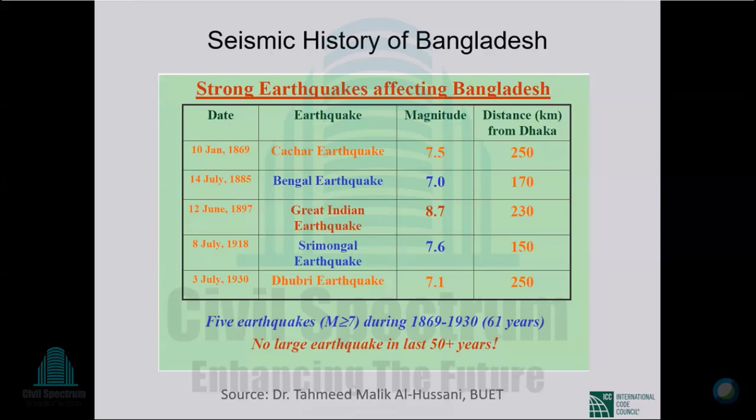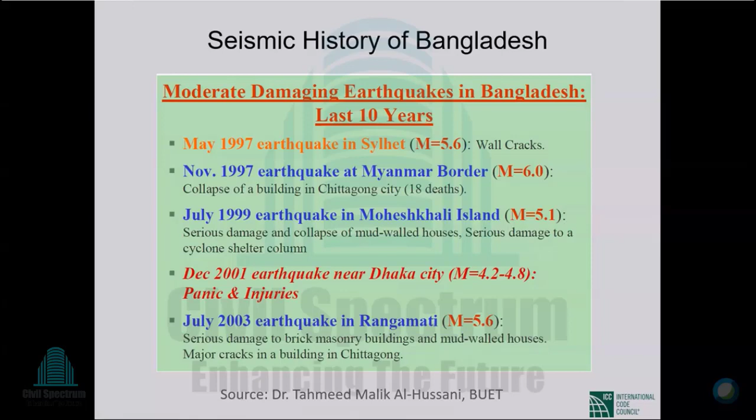The important thing is no large earthquake in the last 50 plus years. Okay? So we just have been lucky. It is approaching 90 years of no large earthquake. Moderate damaging earthquakes in Bangladesh during the last 10 years: there is a list. May 1997, Sylhet, November 1997 near Burma border, July 99, Moheshkhali, December 2001. This is an earthquake near Dhaka. There was panic and injuries as the slide shows. July of 2003 earthquake in Rangamati. So there has been no large earthquake, but there have been moderate earthquakes in the last 10 years, definitely.

The next thing that I want to touch upon are these terms hazard and risk. They are quite often used synonymously, but they are not interchangeable. They are different things. Hazard is the potential for ground shaking or flood happening or a cyclone hitting. So the potential for something happening is the hazard. Risk is potential for losses if that something happens. Okay, so potential for losses, human loss, economic loss, all of that that is associated with the hazard. So flood is a hazard. People dying of flood is a risk.

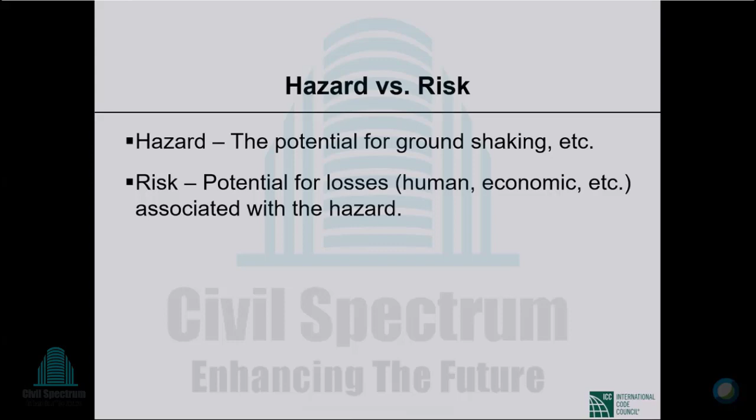Okay? And that tells you that earthquake risk depends on what type of structures we are looking at. If they're flimsy structures of shoddy construction, the risk is high in the same earthquake. If they're sturdy structures of sound construction, the earthquake risk is low, the earthquake hazard remaining unchanged. Okay? So hazard versus risk. Hazard is independent of the type of structures or infrastructure you have. The risk is very much dependent on what you have built and how.

Earthquake ground motion. At some time after their generation, seismic waves reach the Earth's surface and set it in motion. The surface of the Earth is set in motion, which we refer to as earthquake ground motion. Very, very familiar term for those of us who deal with earthquake engineering. When earthquake ground motion occurs underneath a building, and when it is strong enough, it sets the building in motion. And the motion always starts with the building's foundation. The foundation is moved from underneath the structure.

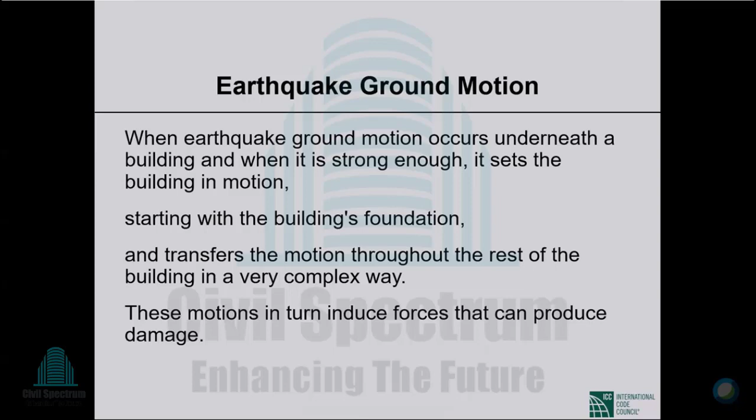The foundation transfers its motion throughout the rest of the building in a very complex way. This is, if anything, an understatement. Okay? So the foundation starts moving in an earthquake, and when I say start moving, it's not in one direction; it is every which way, and this movement is transferred to the rest of the structure in a complex way. These motions, in turn, induce forces in the structure. When the structure begins to move, there are forces induced that can produce damage. We will look at these things in more detail.

If you are far, the ground motion would have died out to some extent, so the movements of the ground and so forth will be less than in the epicentral region. There are all kinds of attenuation relationships that are proposed in the literature, and these are invaluable in trying to figure out the ground motion at a site away from the source. Anyway, I don't want to go deep into any of this.

We can decide whether we will go with the median attenuation relationship or median plus one standard deviation or median minus one standard deviation. We can put an equation to this curve which will tell us how the ground motion dies away. And these are very useful, as I said, in figuring out the earthquake ground motion at a particular site.

The next set of terms that cause a lot of confusion, very, very widespread, are intensity versus magnitude. Earthquake intensity versus earthquake magnitude. Intensity is qualitative, very important, as opposed to quantitative, but it is widely used. Magnitude is quantitative.

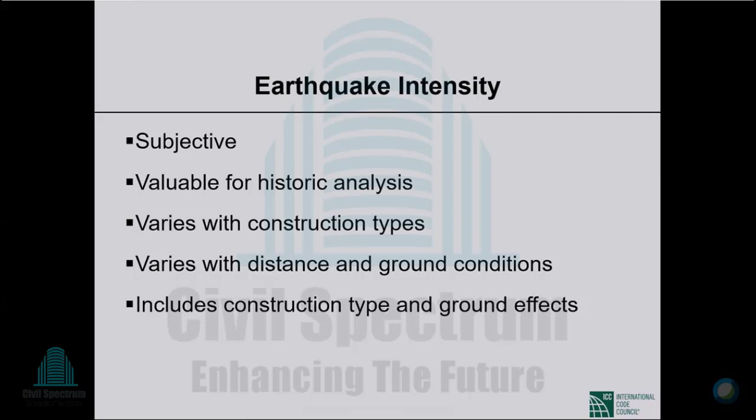So, earthquake intensity is subjective as opposed to objective, valuable for historic analysis. When we did not have magnitudes, we had intensity scales. It varies with construction type. This is very important. Okay, we talked about local conditions. If you don't have any structure, then there is no damage. It varies with distance and ground conditions. Okay, so distance from source to site, and ground conditions includes construction type and ground effects.

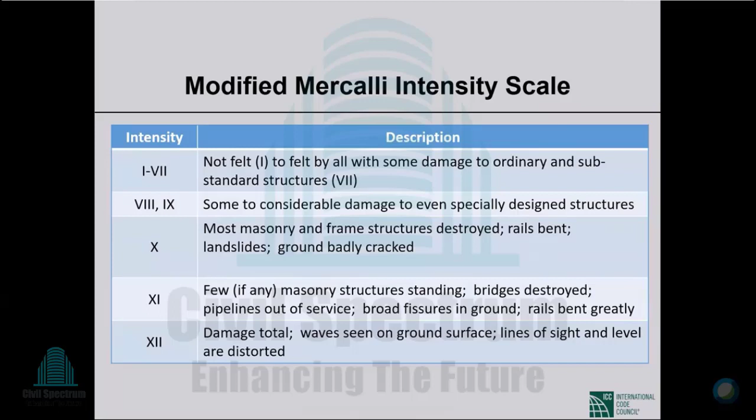So in this business of earthquake engineering, whatever you look at, there is no one intensity scale. There are multiple intensity scales. For magnitude measure, there isn't one; there are multiple. The Modified Mercalli scale, however, is used in much of the world, and this shows that it gets serious when the Modified Mercalli intensity is 8 or 9, some to considerable damage to even specially designed structures. 10, most masonry and frame structures destroyed, rails bent, landslides, ground badly cracked, etc.

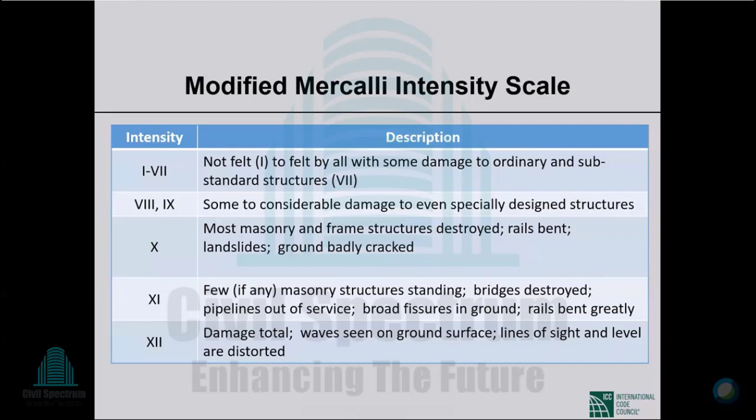11, few if any masonry structures standing, bridges destroyed, pipelines out of service. 12 is almost total destruction. Okay. So below 8, it's not particularly serious, although there can be damage. And when you are looking at 10 or 11, it is a very, very serious affair. Magnitude is quantitative. Magnitude is the size of the seismic wave that is recorded on a seismograph. Okay, the size of the wave.

All magnitude scales are logarithmic. You go from magnitude 7 to 8: the magnitude 8 earthquake is 10 times as strong as the magnitude 7 earthquake. It's not a little bit stronger. Okay, this is very, very important. So 7 to 8 is a tenfold increase in energy released at source. Magnitude correlates with energy released at source, as I just said.

Moment magnitude is the preferred. So there was initially local or Richter magnitude. Now there is moment magnitude, surface wave magnitude, body wave magnitude, and others. Moment magnitude is more and more favored, but we will not go into all that stuff, and the numbers are not terribly different. They are different, but not terribly. I mean, something that is 6 on one scale will not be 9 on another scale. Could be 6.2 or 6.3, whatever. Okay. So, magnitude.

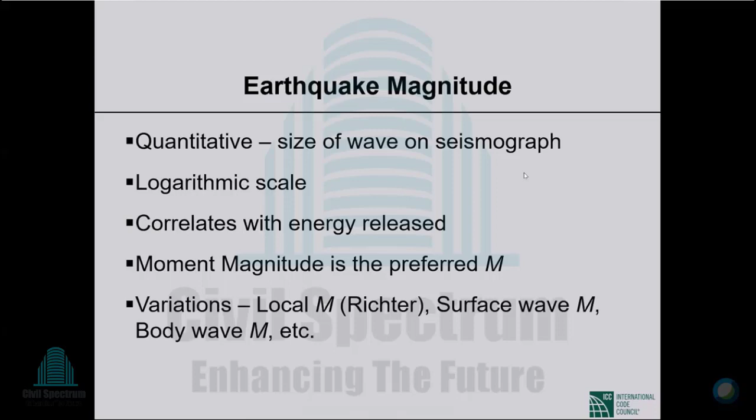Geological factors affecting ground motion at a site. So the source mechanism, the energy released at source, is one thing. The type of fault, the amount of fault movement, how deep the focus is, all of those play a role in the ground motion that you will experience at your site. Those are source mechanism related factors. Then transmission path from source to site. Are the seismic waves coming through rock from the source to your site? Are they coming through alluvium? Are they coming through mud? So this will play a significant role.

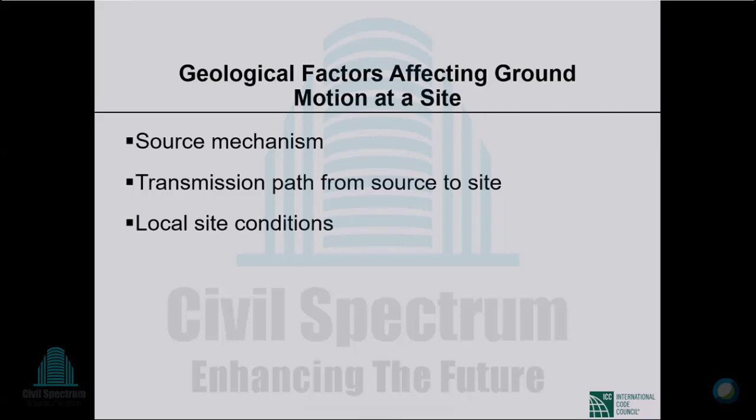And then local site condition. Do you have rock where you are on the surface, or is there a deep soil deposit overlying rock? Because the soil overlying rock can magnify ground motion. That is very important, as you will see in some detail.

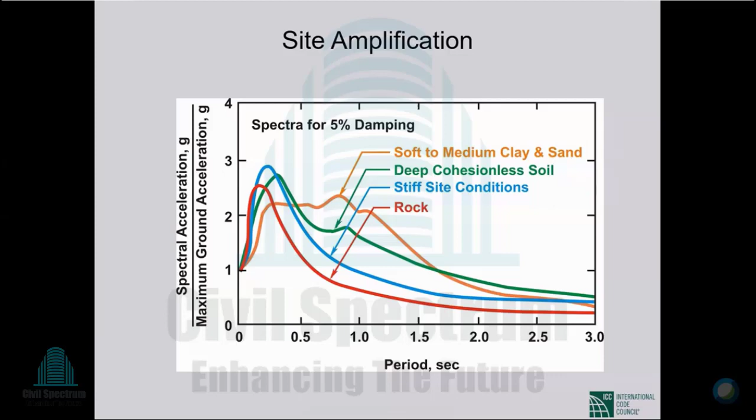If you divide the soil amplification by the rock amplification and plot that as a function of period, you get this history. And the largest number here is almost 5. So the soft soil has amplified rock motion by a factor of 5 or so in this particular case.

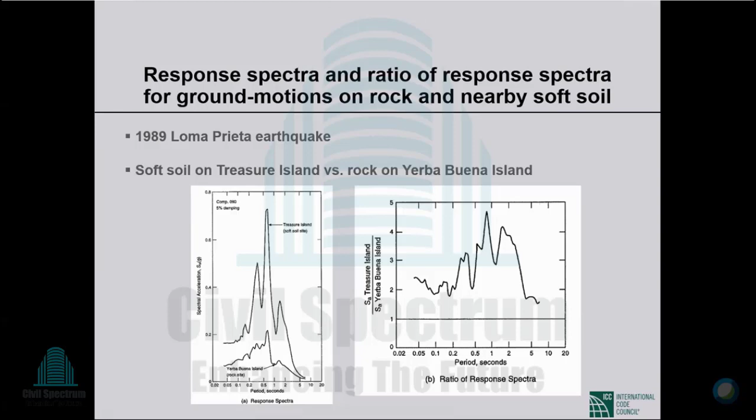Okay. The particular record you see is from the Imperial Valley, California earthquake of 1940, as recorded at the El Centro, California site. At the time this was recorded, this is pretty much the one good strong motion record. Then by the time we had the 1994 Northridge earthquake, that generated more accelerograms than we had until that point in our history. And now anytime the earth moves, we have so many of these things. It's a flood now. These used to be very difficult to obtain. Now we are drowning in accelerograms.

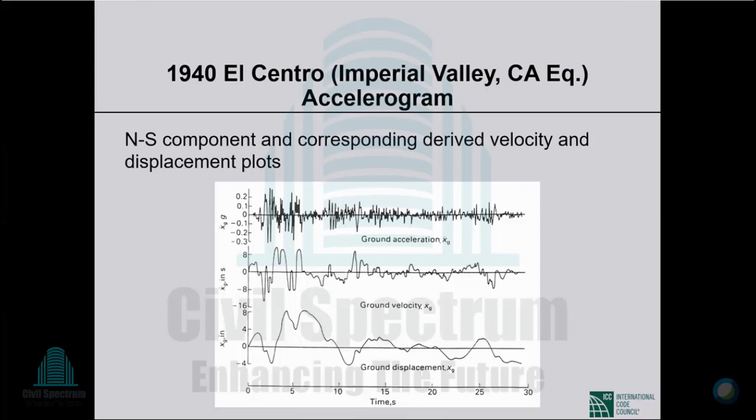The general things I said are true of all earthquakes. The acceleration history is erratic. The velocities look less erratic. The period increases, the frequency decreases, the back and forth motions are not as frequent, and then you go from velocity to ground displacement, it is downright ponderous movement.

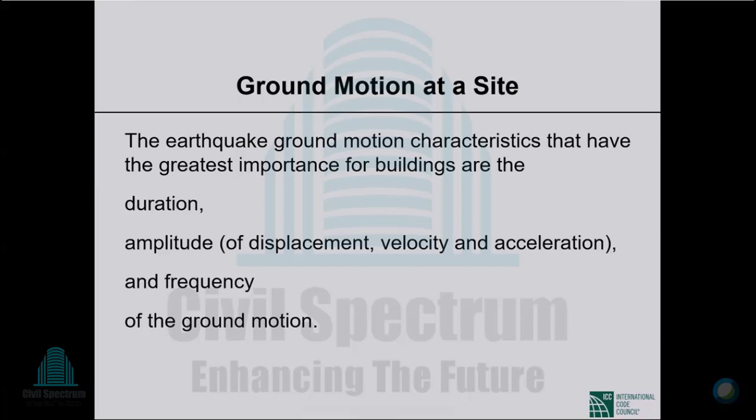Ground motion at a site. The earthquake ground motion characteristics that have the greatest importance for buildings are the duration of the earthquake, the amplitude of the earthquake in terms of displacement, velocity, or acceleration, and frequency of the ground. So, duration, how long the strong motion lasts, the amplitude, and the frequency.

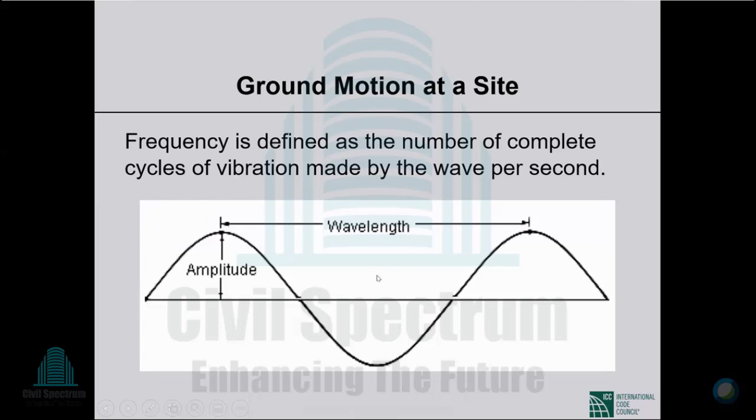So, frequency is defined as the number of complete cycles of vibration made by the wave per second. Okay, one wave is one peak to the next valley to the next peak. Okay. So this is one wave. This is the wavelength. A complete cycle of vibration is from one crest of the wave to the next. Frequency is often measured in units called hertz. It is actually second to the power minus one. If two full waves pass in 1 second, then the frequency will be 2 second to the power minus 1. And second to the power minus 1 is also called hertz, 2 hertz frequency.

Surface ground motion at a site is actually a complex superposition of different vibration frequencies. You will never see ground motion with one frequency. That simply doesn't happen. It is a complex superposition of different vibration frequencies. At any given site, some frequencies usually predominate.

The distribution of frequencies in a ground motion is referred to as frequency content. This term you will see all over the place. So there are many frequencies in a typical ground motion. Some frequencies predominate at a particular location. The distribution of frequencies is referred to as the frequency content.

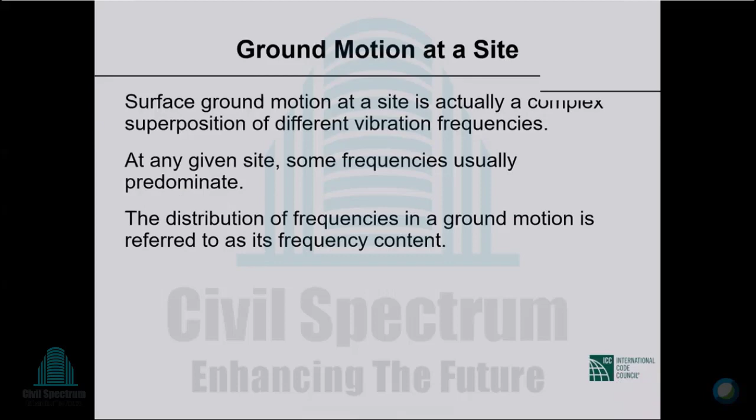Building response to ground motion. The response of a building to ground motion is as complex as the ground motion itself. Did you get that? So the response of a building to ground motion is as complex as the ground motion itself, yet typically quite different. This is important. The building response is different from ground motion.

The building also begins to vibrate in a complex manner, and because it is now a vibratory system, it also possesses a frequency content, different from the ground motion frequency content. However, the building's vibrations tend to center around one particular frequency that is known as its natural frequency. This is very, very important.

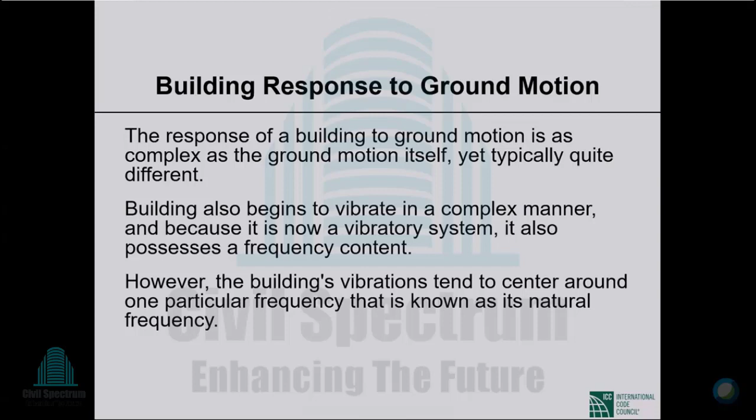Another way to think of building response is in terms of the building's natural period. Period is simply the reciprocal of frequency, as you see here. So T is 1 over F, or F is 1 over T. The unit of frequency is second to the power minus 1, or hertz. For period, the unit is second.

So period is simply the inverse of frequency, whereas the frequency is the number of times per second that a building will vibrate back and forth. The period is the time it takes for the building to make one complete vibration cycle: from rest to one position to the right, to one position to the left, back to rest. The time it takes is the period.

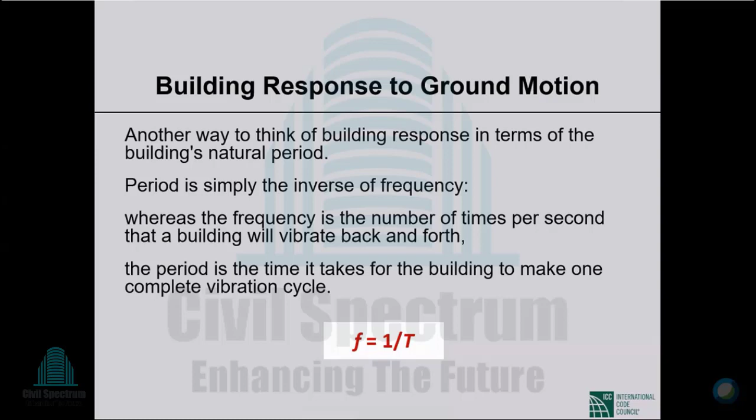This is extremely important. Period is proportional to the square root of mass. So heavier buildings have long periods. A concrete building will have a longer period than a steel building, typically, if everything else is the same: height, plan area, etc. Period is inversely proportional to the square root of stiffness. The stiffer the building, the shorter the period. So the heavier the building, the longer the period.

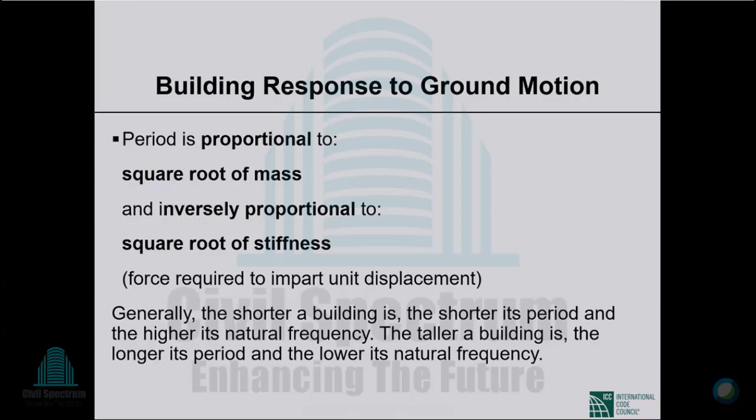Short period buildings are stiff. Tall buildings have less stiffness. They are more flexible. They have longer periods. So these are very important things: proportional to the square root of mass, inversely proportional to the square root of stiffness.

Let us look at period and then damping. So this is a picture from FEMA, the Federal Emergency Management Agency. They put out very useful stuff from time to time. The idea is that you attach a rope to the roof of this building and then pull the rope by a tractor or something.

And at one point you just cut the rope. If you do that, the building will start going back and forth. This is forward motion, this is backward motion, and this back and forth motion will go on for a while. If it is a simple building, with most of the mass here, the building will vibrate following a regular motion, with a regular period. The back and forth motion takes the same time every cycle.

You also see that the amplitude dies down. How much the building moves in one direction decreases with every cycle.

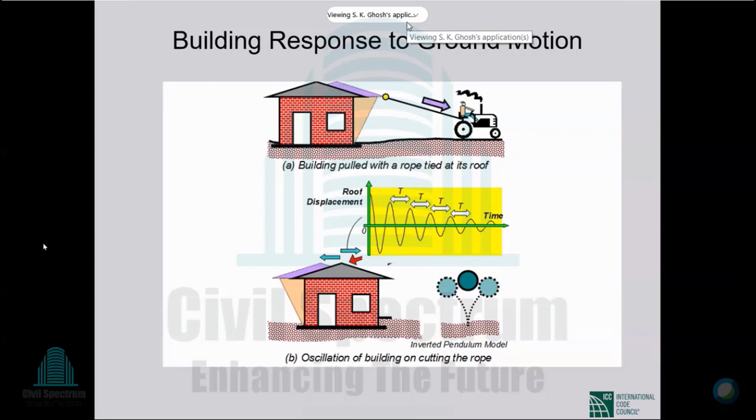Something got messed up. Sorry, Maria. Somebody wanted to annotate or something. I said yes, and now I cannot. No, but it is done. Okay. Good. Thank you. Yeah.

So the decrease in the amplitude is because of something called damping. You swing a pendulum. It starts going back and forth. Newton's first law will tell you that this motion will go on until the end of time. And all of us know that it doesn't happen.

Each time the pendulum goes by, it doesn't go quite as far as it did in the previous cycle. And ultimately it comes back to rest because of damping, which in the case of the pendulum is supplied by friction with the air. So in a structure, the main source of damping is the damage.

So the building goes back and forth in the earthquake. In the process of that, there is cracking, there is yielding of reinforcement, and so forth. That causes damping, which brings the building eventually back to rest. Now, there is an amount of damping at which,

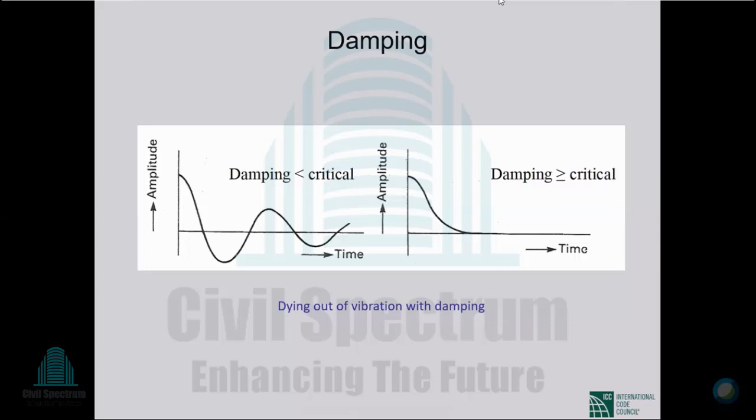In structural engineering, we are dealing with 2%, 5%, at most 10% of critical damping, something like that. Okay, a steel building 2% critical damping, and concrete building 5% with damage that may increase to 10% or more, but it is never 90% of critical damping.

Then the concept of resonance. When the frequency contents of the ground motion are centered around the building's natural frequency, the building and the ground motion are in resonance. Resonance tends to increase or amplify building response. Because of this, buildings suffer the greatest damage from ground motion at a frequency close or equal to their natural frequencies. Okay, this is all very important.

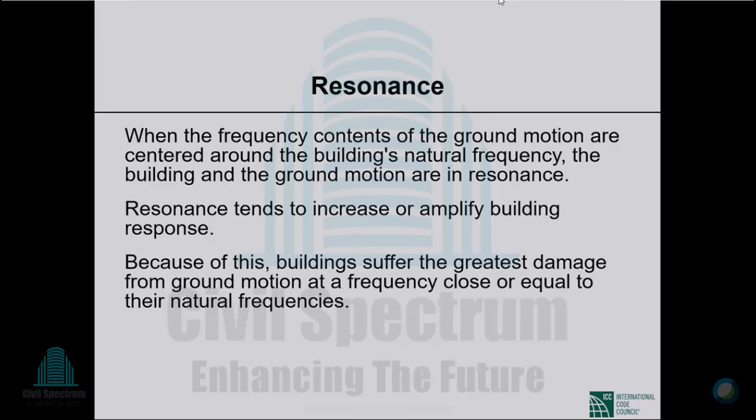If the natural frequency of the building is close to the dominant frequency of the ground motion, then there will be resonant response, and that can get out of hand.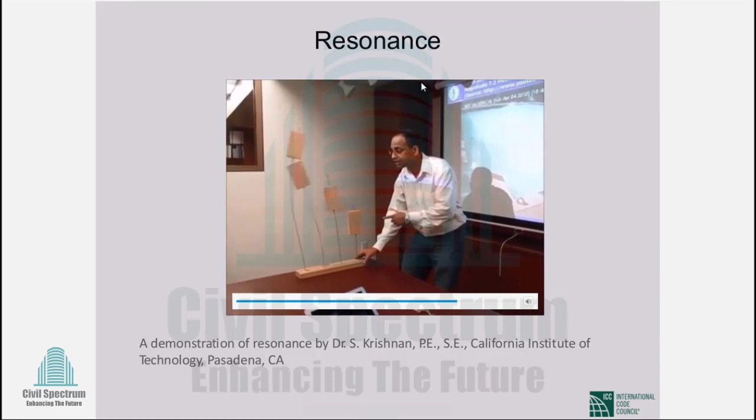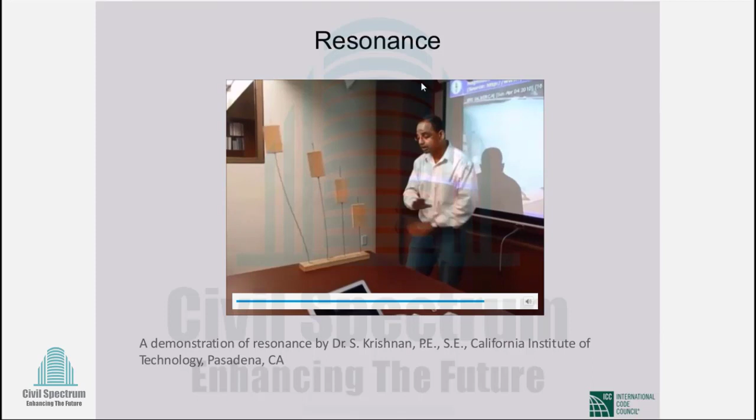So here is long period motion now on the same toy model. Notice how the little house is just sitting where it is, whereas the tall buildings or these long period structures are going back and forth, waving, getting a lot of response, right? So the long period motion does not do anything to the low-rise structure. It selectively excites our tall buildings. This is the difference between long period motions that you can see in a big earthquake versus high frequency motions.

Yes. Click on that. Okay, I think we're okay, right?

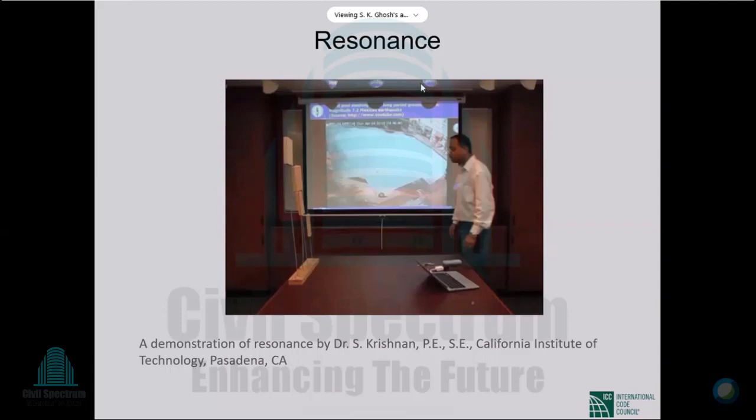Okay, that was Dr. Krishnan, as you see, who was at Caltech at the time he recorded this video, which I thought was excellent. He is back in India someplace. I don't remember exactly where.

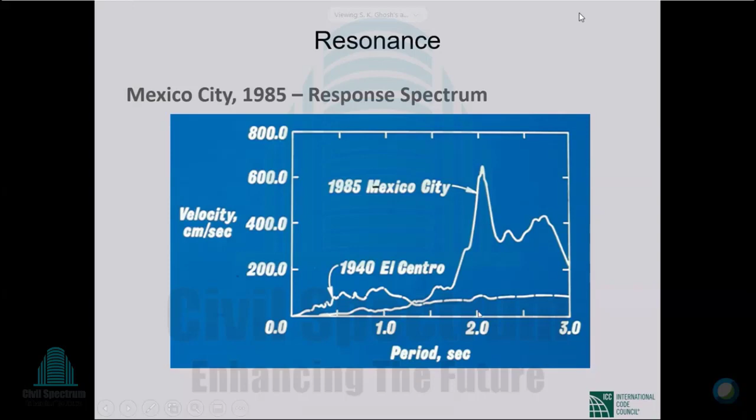The predominant 2 second period of the ground motion is very visible here. On the y-axis is, well, let us say the velocity of the ground; in this particular case it does not make any difference what response quantity we look at. Anyway, let's not spend time on that. On the x-axis is period. The important thing is that the response peaks at a period of 2 seconds, which is the predominant period of the soft soil. So 2 second predominant period of the ground motion.

So structures with a natural period of about 2 seconds would be the worst hit. Those would be, roughly speaking, 20-story frames. But there is a little more complication to that. As a concrete structure accumulates damage, its period increases. So you can start at 1.4; with damage, it increases to 1.6, 1.8, 2.0. Now it rides into the resonant range. So as a result of that, mid-height buildings were hit particularly hard in the Mexico earthquake.

The picture you see is that of the Ministry of Telecommunications or something like that. This is where the country's long distance telephone equipment was housed, and Mexico lost telephone connection with much of the rest of the world as a result of this disaster. Okay? So, this is a building in the medium height range that was the most vulnerable.

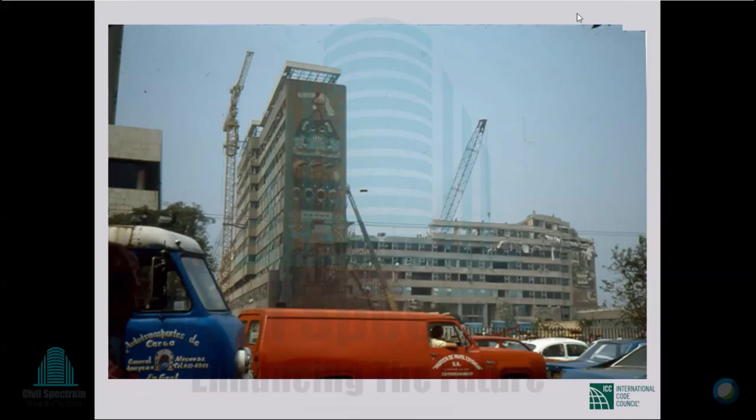The old colonial buildings, much shorter, therefore much shorter period than 2 seconds, did not have much problem at all. There was some plaster loss, something like that, but basically nothing happened to the structure. And at the other end of the spectrum, the landmark Latinoamericana tower, 40 stories or so, 4 second or so period, was out of the range of the earthquake, and buildings of this height did not have any problem either. So that tells you about the importance of resonance.

Another depiction of the same effect that we are talking about. So these are buildings of various heights, and we plotted structural damage intensity on the y-axis and depth of soil on the x-axis. So the deeper soil means we are looking at soft soil effects. Okay, if the depth of soil is very shallow, that means that your structure is on rock or very close to being on rock.

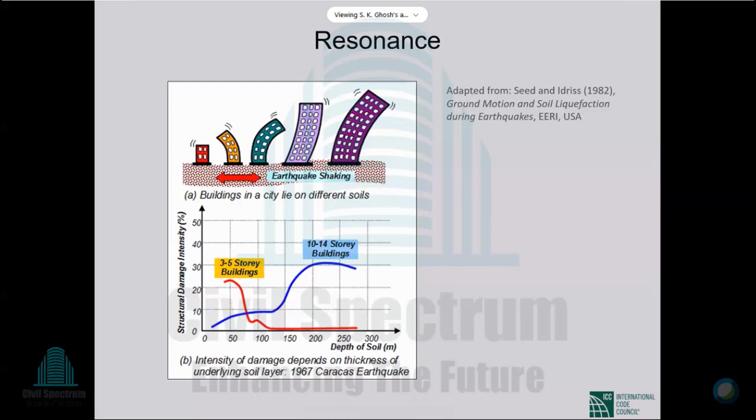So you see that if the depth of soil is low, the low rise building exhibits high response. If the depth of soil is low, you are talking about rock, the predominant period of the ground motion will be short, and the short buildings will respond the most. As the thickness of the soil increases, the predominant period of the ground motion will be longer, and now the taller buildings will be hit more. And that's precisely what you see in the picture.

Okay, moving on. Inertia force. Acceleration has important influence on damage because as an object in motion, the building obeys Newton's law of motion. So, force is mass times acceleration, as we all know. Okay? So, a building moves back and forth. So, if you are on a floor, it undergoes displacement. The first derivative of the displacement is velocity. The second derivative of the displacement is acceleration. So a floor is undergoing displacement, velocity, acceleration, and the higher derivatives are also important for occupant comfort and so forth.

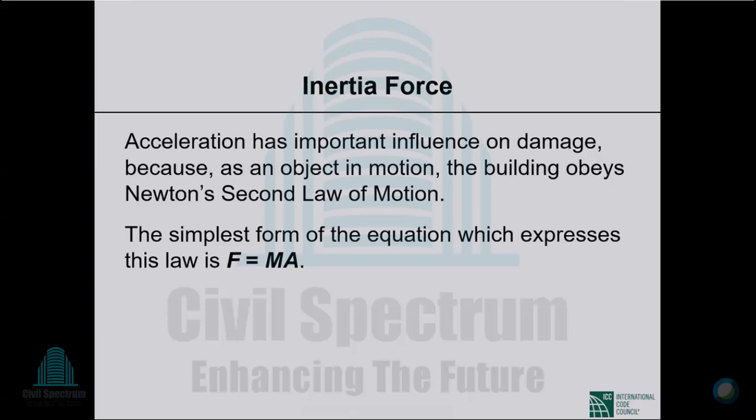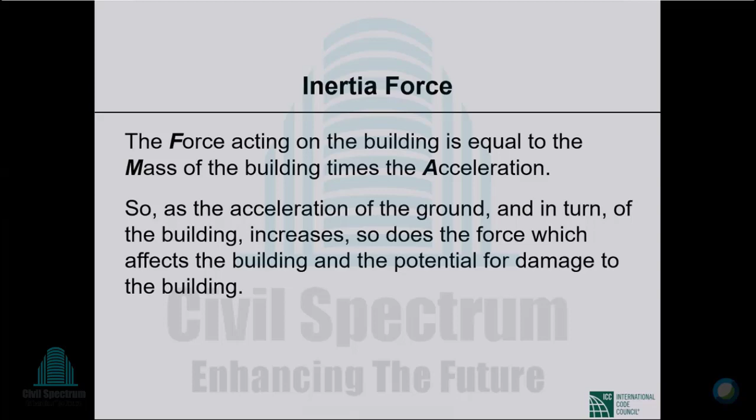Anyway, the acceleration times mass is a force. So the structure is now going to experience forces caused by this acceleration, and that has consequences. So the force acting on the building is equal to the mass of the building times the acceleration. So as the acceleration of the ground and in turn the acceleration of the building increases, so does the force which affects the building and the potential for damage to the building. Okay, so let me repeat. As the acceleration of the ground and in turn of the building increases, so does the force which affects the building and the potential for damage to the building.

So when the foundation moves, to keep the mass where it was would require a force in the opposite direction to that of the earthquake. And that is the inertia force that is generated in the structure as a result of the motion of the foundation. Okay, inertia force.

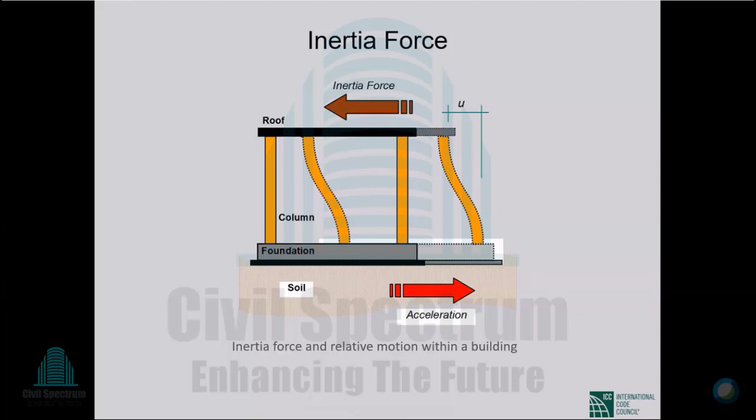So if the ground acceleration is, I'm sorry, this notation is pretty popular. UG double dot. U is the displacement, G is for ground. So the ground displacement, single dot is the first derivative, double dot is the second derivative. So if the ground acceleration is UG double dot, which is a function of time, the inertia force would be the mass times the ground acceleration, assuming there is no amplification of the ground acceleration in going from the ground

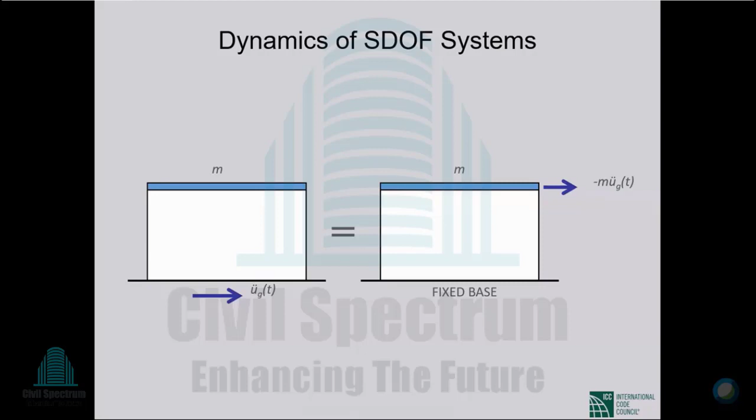to the mass. But the important thing is the negative sign. The inertia force is in a direction opposite to that of the earthquake. So in some circumstances, dynamic amplification due to near resonance that we talked about can increase the building acceleration to a value 2 or more times that of the ground acceleration at the base. So ground acceleration is 1 inch per second. You can have 3 inches per second acceleration at the roof level of a structure.

Generally, buildings with higher natural frequencies or short natural periods tend to suffer higher accelerations but smaller displacements. So stiffer buildings will get higher accelerations, lower displacements. More flexible buildings will be the other way. Lower acceleration but larger displacements. This is how it goes.

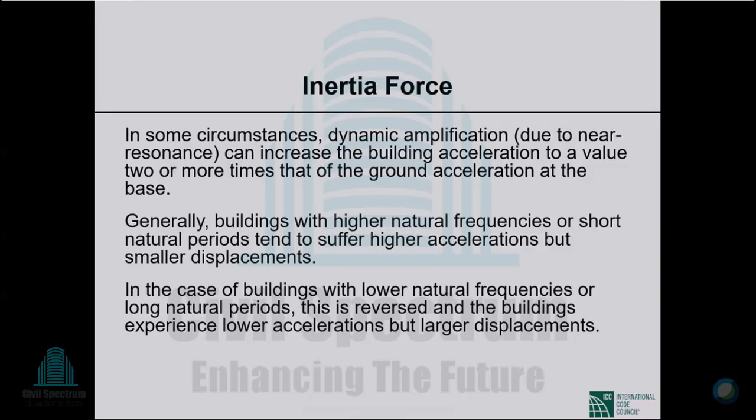Okay, so in an earthquake, the foundation underneath the structure all of a sudden starts moving every which way. The rest of the structure, unless it is a very short, stiff structure, cannot readily follow the movement of the foundation. It lags behind and then tries to catch up with the movement of the foundation. In the process of that catching up, inertia forces are generated where the masses are, mainly at the floor levels and the roof level.

And the challenge to us engineers in earthquake engineering is to take those inertia forces down from where they originate, namely the floor and the roof diaphragms, down to the soil underneath the foundation where all loads ultimately belong. So that's where the concept of load path comes in. We as engineers must provide paths for the loads to go from the point of application, or in this case, the point of origin. These are inertia forces, they originate within the structure where the masses are. We have to provide paths for them to travel down to the soil underlying the foundation.

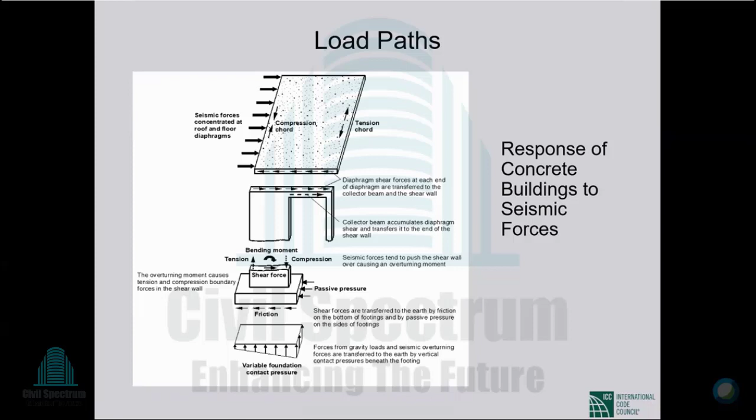So, load paths from point of load application or origin down to soil underlying foundation. The load paths that we provide should preferably be direct, which comes from simple configuration of our building. Too many offsets and turns and rounded... Anyway, the more complicated the configuration goes, the less direct is the load path. We also want multiple load paths, ideally more than one way for the loads to go from origin to the soil underlying foundation. And that is the concept of redundancy that you keep on hearing about, multiple load paths.

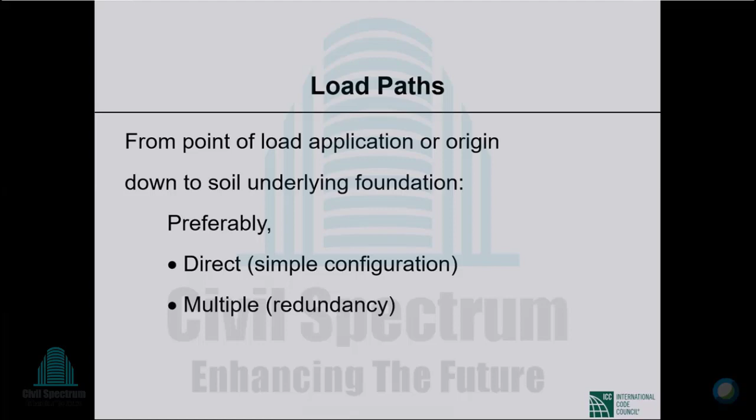Okay, now a kind of a change of pace, if you like. So, earthquake damage mechanisms. Ground shaking obviously can cause earthquake damage, and that's what we have been talking about for a while. But there is also ground failure, which can be rupture of the ground in an earthquake, liquefaction of the ground, landslide, or lateral spreading of the ground. Then there is tsunami and seiche, which are similar things, and we will explain.

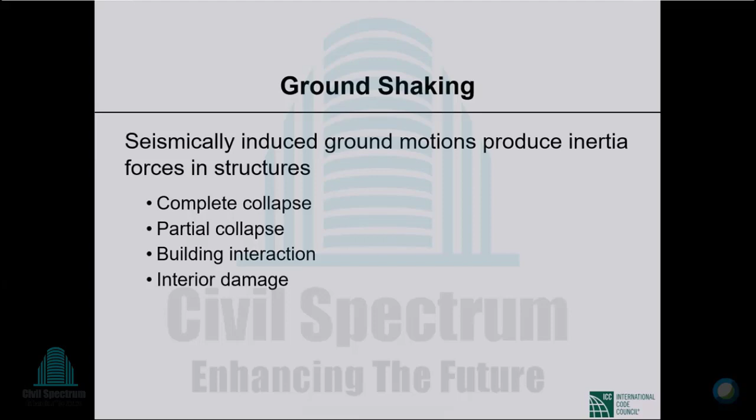So ground motion first. Seismically induced ground motions produce inertia forces in structures, and these may cause complete collapse, partial collapse, building interaction, hammering, we typically call it, or interior damage. So this is an instance of complete collapse. This is Agadir, Morocco, earthquake, 1960. Old picture. Anyway, the picture is graphic enough. Left picture shows you a building standing. The right picture shows you the same building in a heap after the earthquake. Okay, nothing redeemable here.

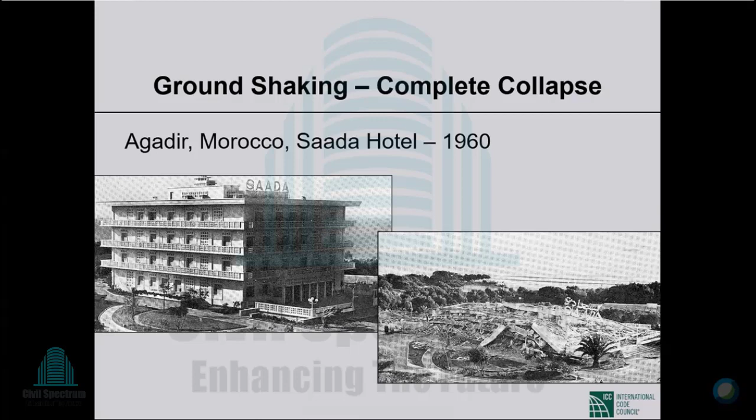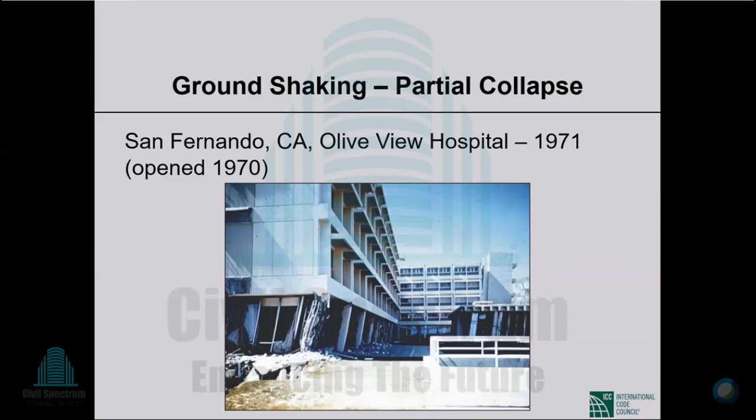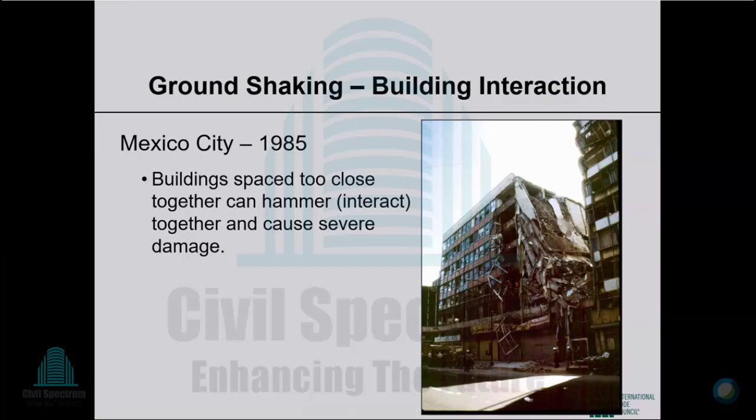Building interaction. Two buildings close to each other, not enough gap in an earthquake. One building hits against the other, and you see the consequence in the right hand picture. I will show you more of this tomorrow. Okay, so buildings spaced too close together can hammer together and cause severe damage. And I have a lot of stuff. Obviously, I have to be very selective in what I can show you within the time limitation.

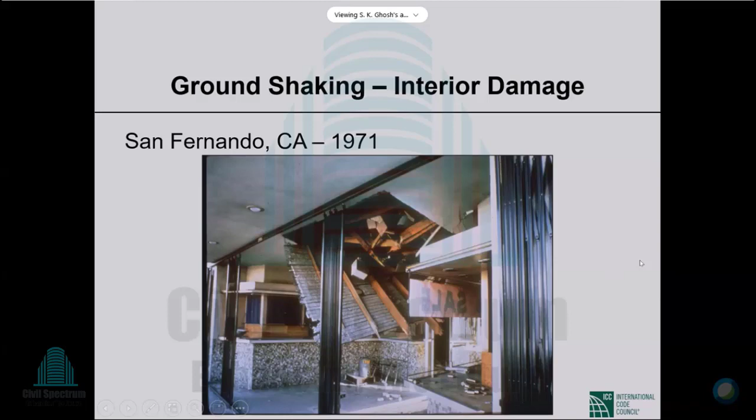Interior damage. This is so common that I cannot even tell you. This is a picture after the San Fernando earthquake. Could be any building. You see the false ceiling, and here it is intact, but there it has come down. And this is not anywhere near as bad as you see. At the very end, I will show you a video that will, I think, impress you.

Ground failure: fault rupture, liquefaction, landslide, lateral spread. Fault rupture. So this was one fence before the earthquake. The ground has ruptured in an earthquake, and you see now there is an offset. In Turkey, after the 1999 earthquake, I won't be able to tell you the name of the place. Anyway, I saw with my own eyes, fault rupture had gone through somebody's bedroom. Part of the bedroom was here, and the rest of the bedroom was a good 6 to 8 feet away. Okay. This can happen. I have, as I said, seen with my own eyes. Okay. So fault rupture.

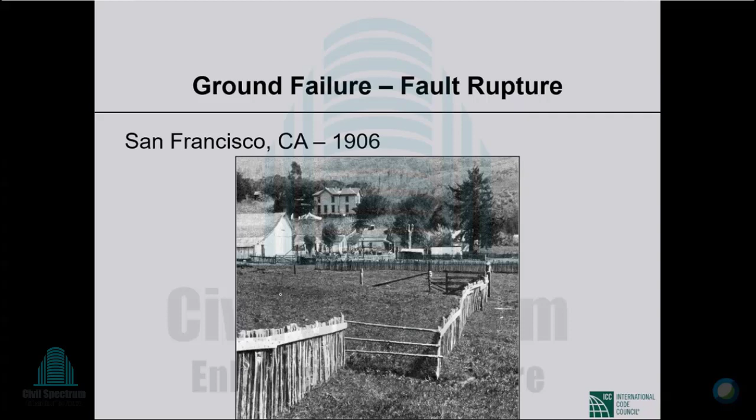Liquefaction. Loss of shear resistance in saturated soil caused by seismically induced ground vibrations. So this is a famous picture from Niigata, Japan, 1964. The whole building has toppled over because the piles have pulled out. Saw so many instances of this in the Bhuj earthquake. I think it was 2000 or so in Gujarat, India. I think I have some pictures tomorrow. Anyway, so this is less uncommon than you would think.

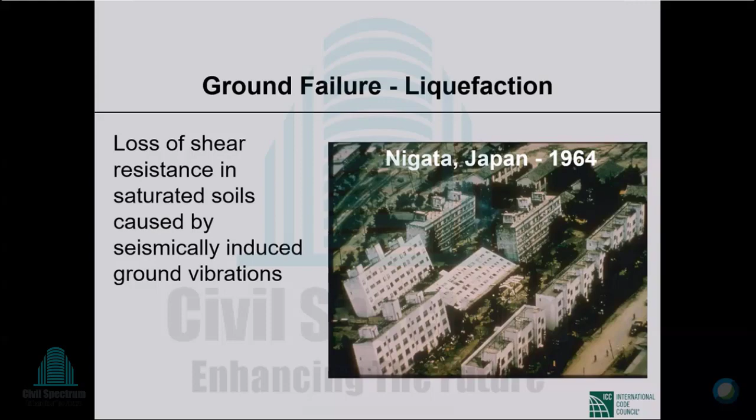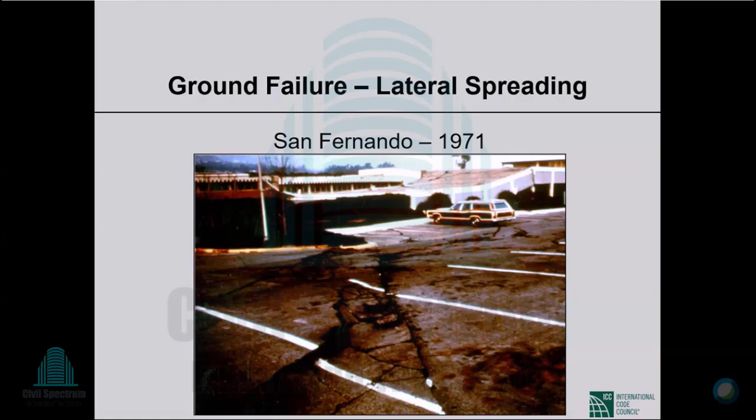Lateral spread, you see the term, I think, is descriptive. After the Chile earthquake 2010, saw so much of that in many parts. Landslides.

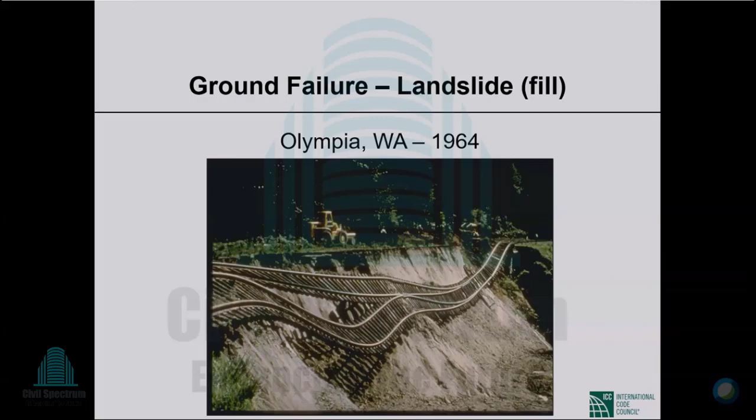Look at that. The railway lines. The landslide has, you know. So these are devastating things. Some of it we can do something about. Other things we better stay away.

Tsunami is seismically induced sea wave. You probably have heard plenty about it in recent times. We have added tsunami resistant design in ASCE 7 in the 2016 edition. It is pretty complicated stuff. Today is not the day to go into whether there is tsunami danger for Bangladesh and so forth. But anyway, tsunamis are devastating, devastating. I have no other word for it.

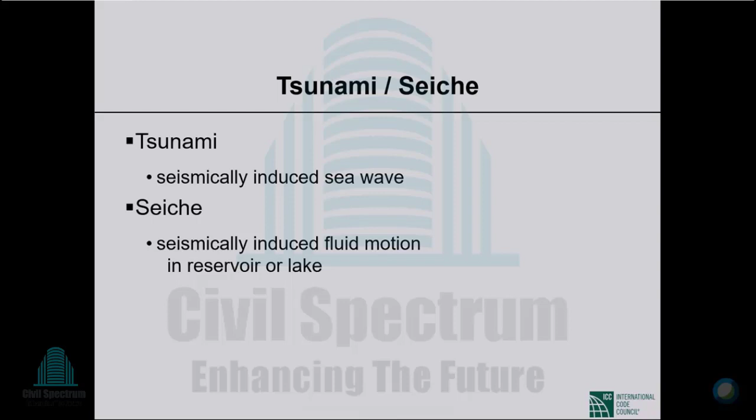I have seen entire communities totally wiped out after this Tohoku earthquake, the last big one in Japan. Seiche is seismically induced fluid motion in a reservoir or lake. So tsunamis are in the ocean. Seiches are in inland bodies of water. Same phenomenon.

So ground shaking, the scope of effect of ground shaking is wide, and we can design to resist ground shaking. Fault rupture you cannot do anything about. The effect is local, and you better avoid it. If you have knowledge that there is an active fault, you better not build on it. It's as simple as that.

Landslide is the same thing. You cannot engineer against landslides. You better avoid landslides or build where there is no known danger of landslide. Liquefaction, avoiding is definitely an option, or you can do something about it. You can improve your site by injection of cement and things like that.

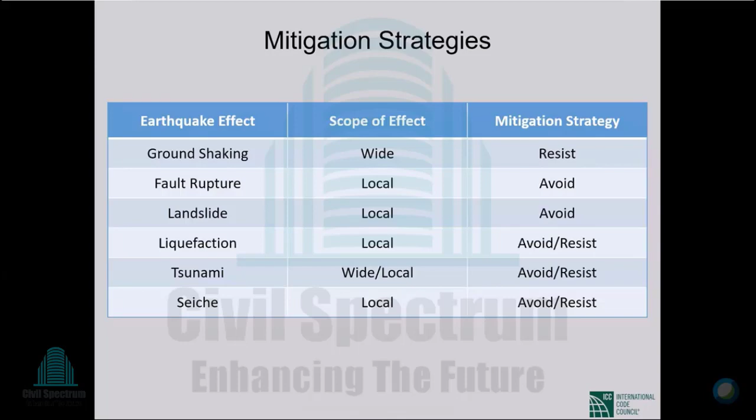Tsunami, better to stay away, but these days we can design tsunami resistant structures. And seiche is the same as tsunami. It's probably better to avoid, but if we need to, we can design to withstand the effect of seiches.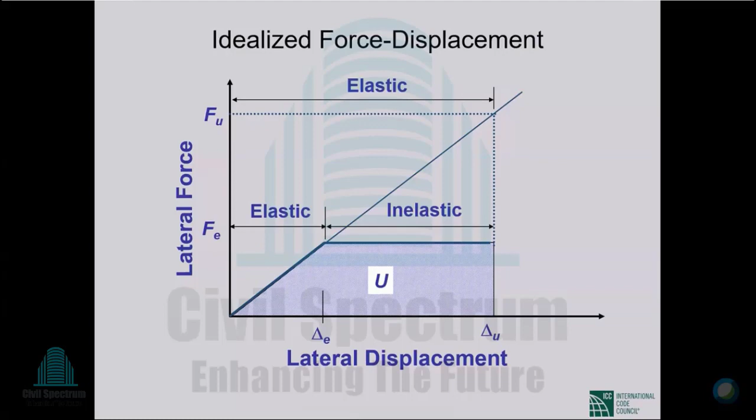Okay. Now, our codes, and BNBC is modeled after US codes. In BNBC also, we have three recognized levels of detailing: ordinary, intermediate, special. Let us forget for now about the seismic design categories. That's another discussion. So, ordinary detailing will give us low inelastic deformation capacity. We will need to design for higher strength. The special detailing will give us high inelastic deformation capacity. We will be allowed to design for low force levels, and intermediate is intermediate. It gives us something in between the ordinary and the special.

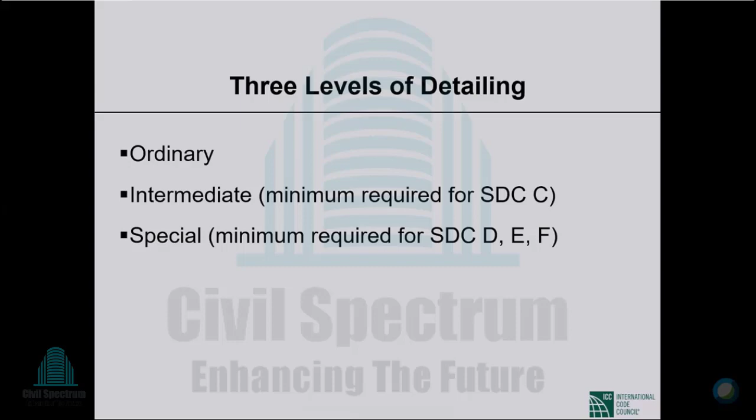The tie between the strength and the inelastic deformation capacity is the response modification factor R that you see in the design base shear equation of the code. If you have special detailing, we will give you a higher R value to design with. R is in the denominator of the design base shear equation. You will have a lower design base shear. If your detailing is ordinary detailing, your R value will be low and your design force level will be high. Okay? So ordinary, intermediate, special detailing.

Now the earthquake force resisting structural systems. We have basically four recognized systems, and then everything else is called undefined structural systems. In BNBC, they are called special structural systems. The first is moment resisting frame system, where beam column frames or slab column frames, as may be, carry gravity as well as lateral loads. There are no shear walls doing anything significant for you. Okay, so the same frames carry gravity loads and lateral loads due to earthquakes.

Moment resisting frame system. Second picture shows you what is now called the bearing wall system. Shear walls by definition carry in-plane lateral loads in addition to gravity, in plane as opposed to out of plane. So in a bearing wall system, shear walls carry gravity loads, and the same shear walls also carry lateral forces due to earthquakes. There are no frames doing anything significant for us. So, moment resisting frame system, bearing wall system.

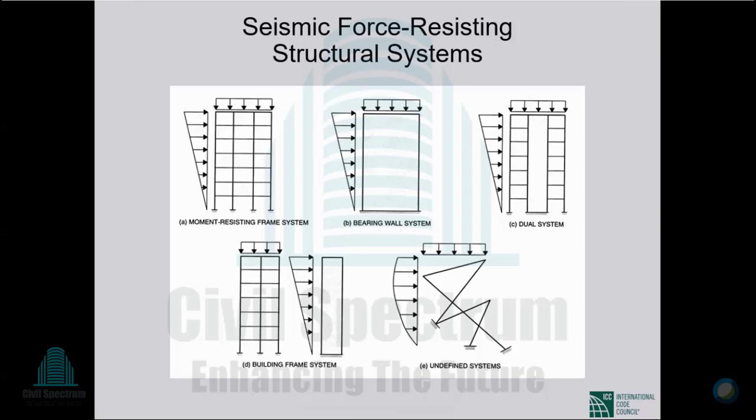And you don't build frames with wood, but steel and concrete, and these days there are composite steel and concrete moment frames. So there are three levels of detailing, there are different materials of construction, and four basic structural systems. All together we have a lot of choices, as you will see as we take you through the details of code provisions.

Okay. Different categories of concrete moment frames and shear walls recognized by US codes and standards. So when it comes to moment frames, we have ordinary reinforced concrete moment frames that can be cast in place or precast. We have intermediate reinforced concrete moment frames that are cast in place only. There is no precast intermediate moment frame. And special reinforced concrete moment frames can be cast in place or precast.

Shear walls: ordinary reinforced concrete shear walls can be cast in place or precast. There is an intermediate precast shear wall, but that is precast only. There is no cast in place intermediate shear wall. And then special reinforced concrete shear walls can be cast in place or precast. So interestingly, the intermediate moment frame is always cast in place. There is no precast recognized in our codes. The intermediate shear wall, if you are going to build one, is always precast. There is no cast in place recognized in our codes.

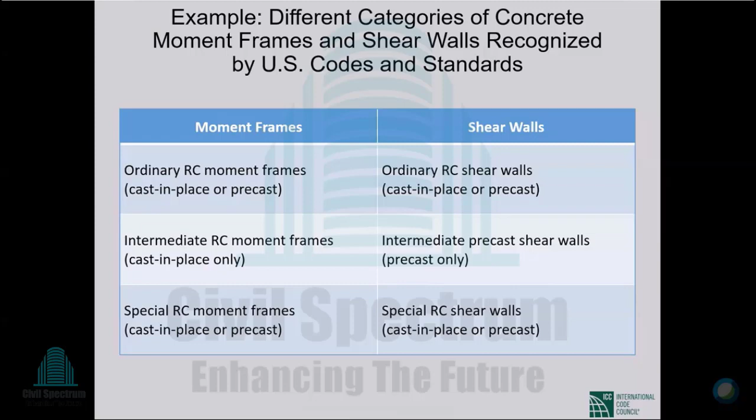Precast, I do not think is that big yet in Bangladesh, so we probably won't talk much about it in subsequent days and in subsequent courses. But that's where things are.

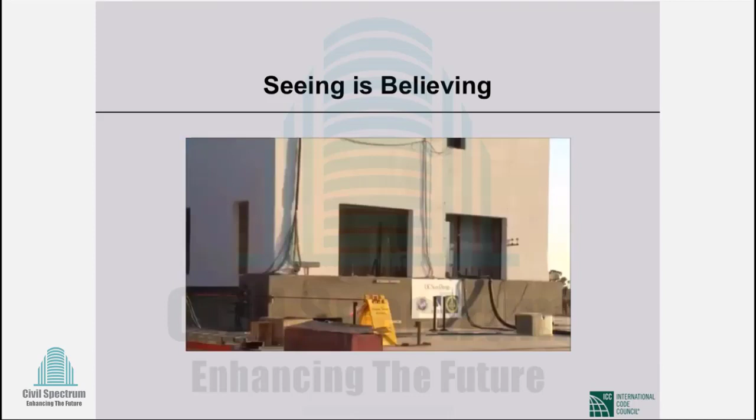May 15th. Finally, it is time for the ultimate test, the maximum considered earthquake ground motion. This is an earthquake with a 2,500-year recurrence interval. Code-based designs for this motion have the performance expectation that the building will not collapse, but will lose functions and be severely damaged beyond repair. 10, 9, 8, 7, 6, 5, 4, 3, 2, 1, running.

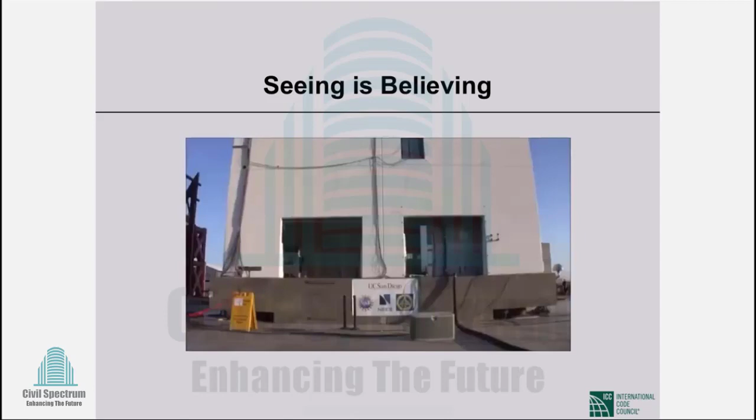The violence and severity of the quake is clear. This would be a frightening experience not soon forgotten. The forces and displacements on the structure are extreme. At points during the shaking, floors 2 and 3 are displaced by nearly a foot in both directions. The heavy upper cladding is shaken violently, but remains attached. The lower cladding tears like paper. Interior furnishings are thrown about by the violent accelerations. Those that are unrestrained are tossed about like so many toys, while anchored items ride out the seismic storm, jerked to and fro along with the walls and floors to which they are attached.

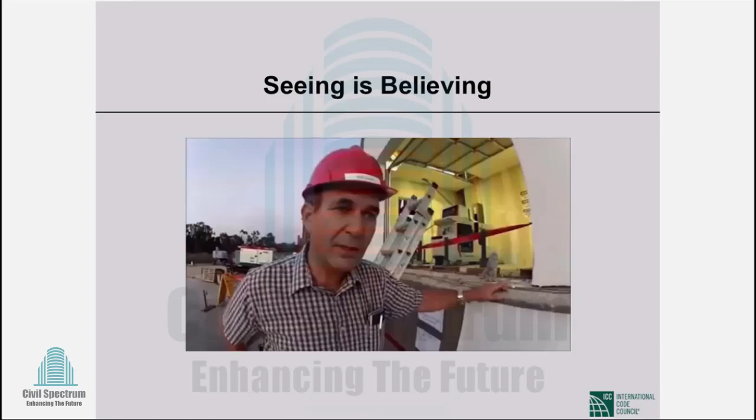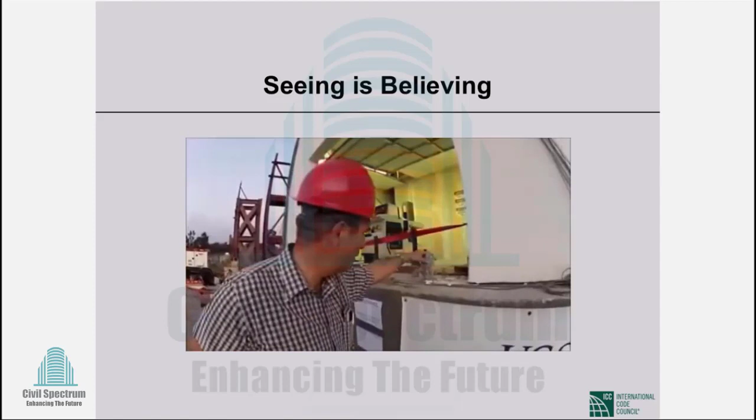Close inspection reveals that the building suffers irreparable damage. I think this building in a real world situation would be condemned. The columns, the base of the columns, the concrete is falling off, especially the two columns on the east. There is a beam at the top of the first story where there is a full plastic hinge formation with a lot of concrete that detached. You see these blocks of concrete here. We can see the rebars. They are naked now. At different floors, you can see the formation of the punching failure mechanism of the slab around the column, not far from really collapsing.

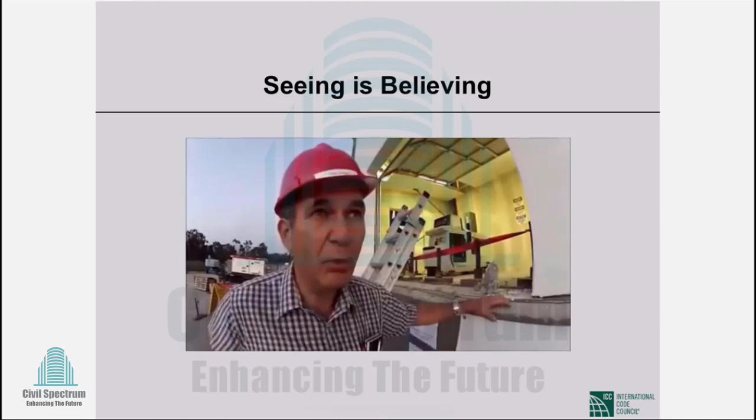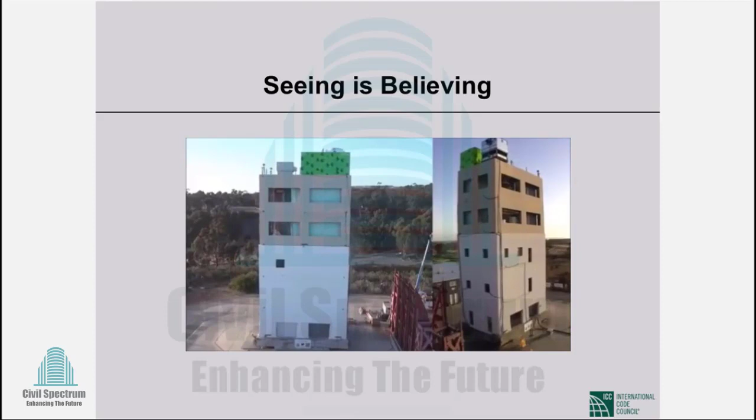From the third floor to the fourth floor, the stairs are detached. They are hanging. There are a lot of gypsum board, huge gypsum board that detached, that fell off. At every floor, the frame of the elevator door has been seriously damaged. The doors are locked, in an oblique fashion. But the building has done its duty. It bent and cracked, but did not collapse. It satisfied the design objective. The structural system should still stand, even though maybe close to collapse, but still stand.

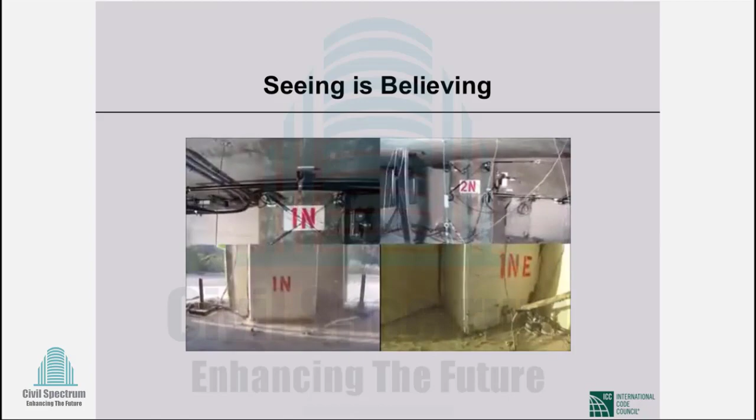Okay, so I think the very important point that Professor Conte was making, and this is really important, is that when we design by our codes, we design to avoid collapse in what is called the maximum considered earthquake. The maximum considered earthquake, at least in BNBC, here it has gotten complicated, but in BNBC 2020 edition, is the 2500 return period earthquake, an earthquake that is expected to occur once in 2500 years. Okay? So we are designing to prevent collapse in that earthquake.

We are not designing to prevent damage in that earthquake. That would require elastic response to the maximum considered earthquake. That will be absurdly expensive, and it does not make sense to spend that money on something that may or may not happen. This is the thing about earthquakes.

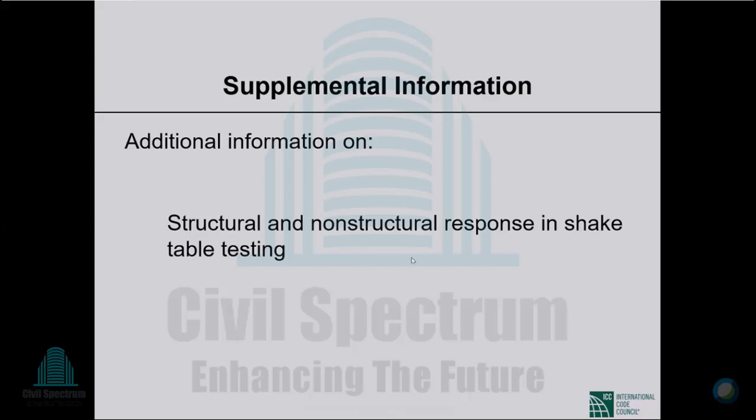Okay, with that, I was afraid that I'll be short of time today. I do not exactly know how it happened. We are ahead of time. It's difficult to judge these things. Anyhow, I haven't quite done this seminar before. So I am open to questions, and somebody has to help me look at the, yeah, Maria. Okay, so I will read the questions. Obviously, this is the first time I'm reading them. I may or may not be able to answer. Let us see where we go.

So, to performing time history analysis, which ground motion data can we use according to BNBC 2020? If we have to consider 7 earthquake records, then which records can we use for our purpose? This I cannot answer for you right on the spot. There must be information available. There is Bangladesh Geologic Survey. I know that there is ground motion information available from them.

And this ensemble of 7 records has now become 11. I think in BNBC 2020 it is still 7. But anyway, you need to get hold of what is available, and then having knowledge of your site, you have to choose the right 7, and there is ample guidance and literature available on how you make that kind of a selection. But I cannot give you specific answer without looking into the situation in Bangladesh.